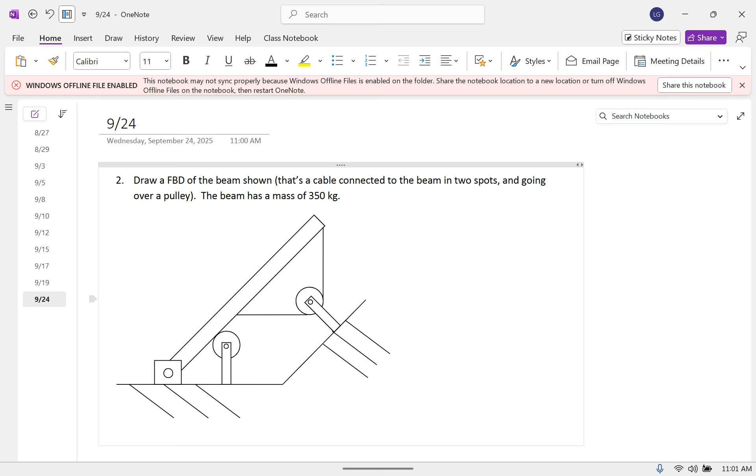So 3433.5. Okay. Well, first you have to understand what I'm drawing here. I made this problem before I got a bit better at using these drawing tools, but that's supposed to be a pin joint down there, a hinge joint down at the bottom. So if you didn't interpret that right, then that's not your fault.

Okay, so here's the closed outline. And then the weight acts at the middle. And that is 3433.5.

And now we have to go and look at all the places that the surroundings make contact. I'll start down at the pin joint. The rule for a pin joint is it restricts both components of translation, but no rotation. So that's an unknown force vector. I'll call that R.

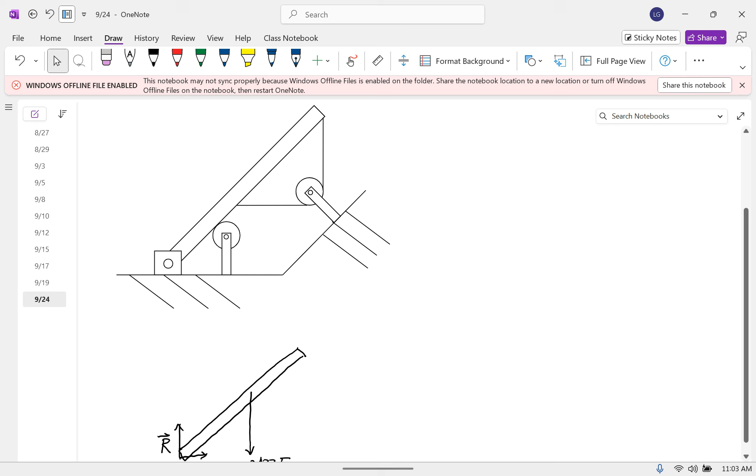And then the rotation, because the hinge allows rotation. Remember that the forces have to do with the motions that aren't there, not the motions that are there. Exactly, think about the degrees of freedom that are disallowed by the joint. So it doesn't disallow rotation, so there's no couple.

Now we'll go to that roller. The rule for a roller is that's perpendicular to the surface toward the body. So that's going to be... I think so, let's look.

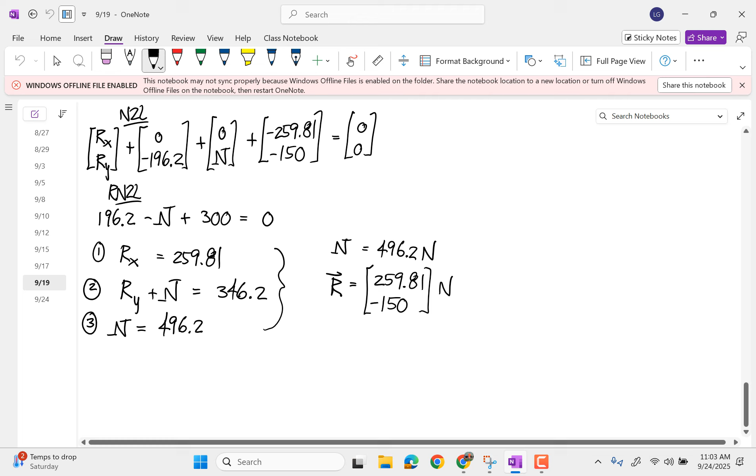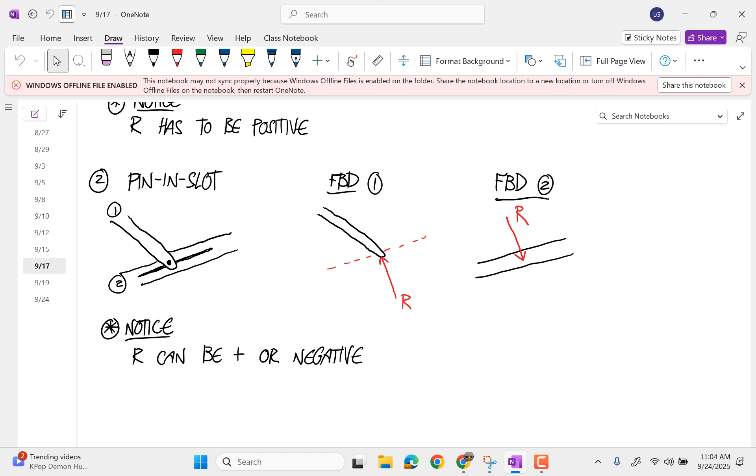Are we assuming no height because it's not specified? On a free body diagram, it doesn't matter since we're not doing any calculations, but you're right that if it's ever not specified on something that looks slender, you can just assume that the thickness is 0 or whatever. I don't think you specifically said the roller did that. I guess not, but you did an example with one later on.

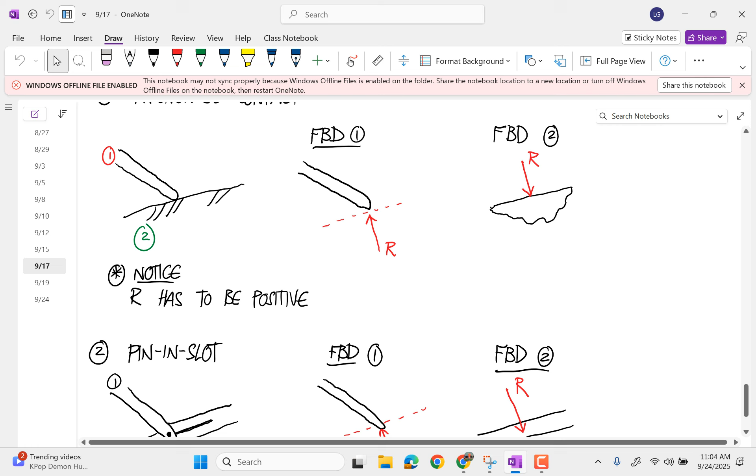Okay, so a roller works the same as a frictionless contact. So then this is going to be perpendicular to the surface toward the body. I have to give that a name that's not R, so I'll call that N.

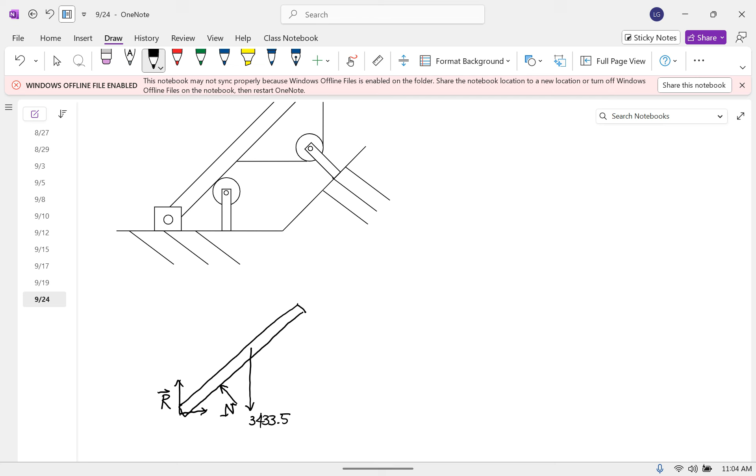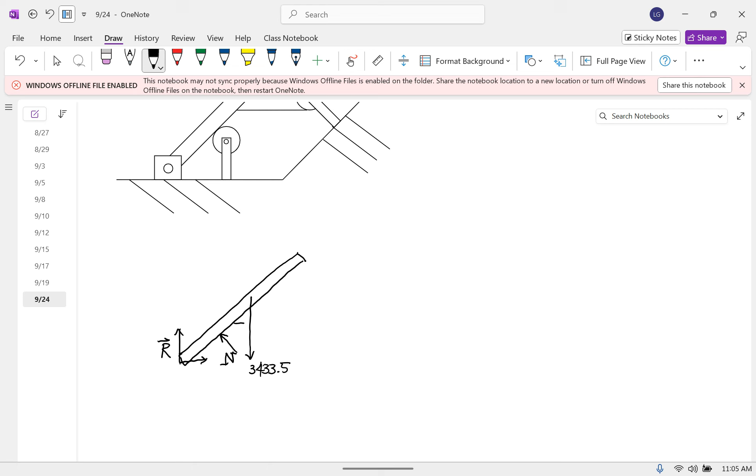And now the only two places that are left are the forces applied by that cable. The pulley doesn't touch this body, so we don't have to treat the pulley explicitly. So all we have is a cable force here that's parallel to the cable away from the body, and then another one here that's parallel to the cable away from the body. It's the same cable just going over a pulley, so it's the same T.

How do we know the cable is pulling and not pushing? Cables can only pull. Yep.

What is R in here? Reaction. So that is the unknown force vector that keeps that bottom point of that beam from translating anywhere. So if you gave this thing a little nudge and this joint wasn't here, that end would move. The joint keeps it from moving.

Professor, so for the joint, when can we say what specific angle it is, and when do we need to do the general R? Yeah, you can only say the specific angle when it is a frictionless contact or a roller. Okay, or a

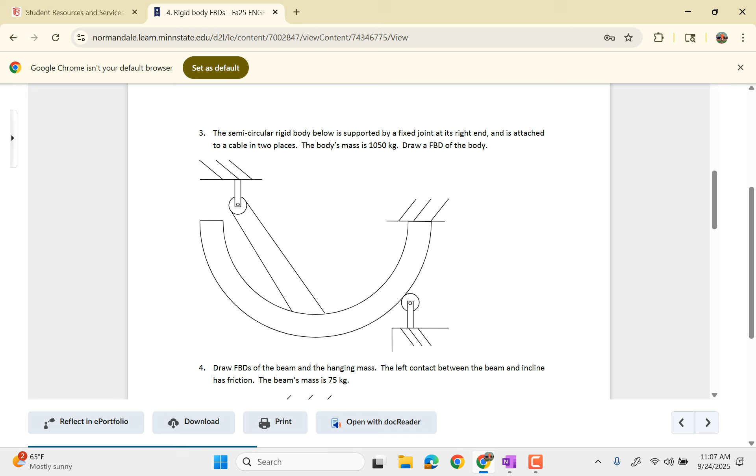Okay, so this is this curved body, and it's connected to a cable in 2 places that goes over a pulley. It's connected to a roller, and then there's a fixed joint at the top.

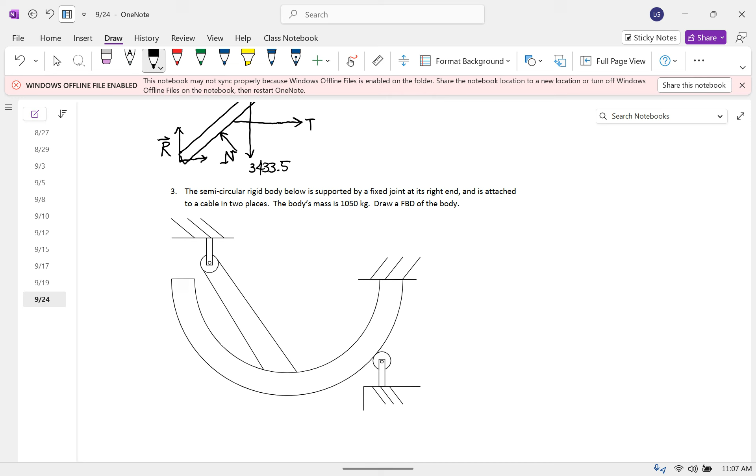One thing I want to point out is this one. No, I don't think this one should be solvable either, because we have 1, 2, 3, 4 variables. So Newton's laws only gives us 3 equations for a rigid body. So we can do this free body diagram, and all those forces are right, but we don't have a way to solve for those. And we won't in number 3 either.

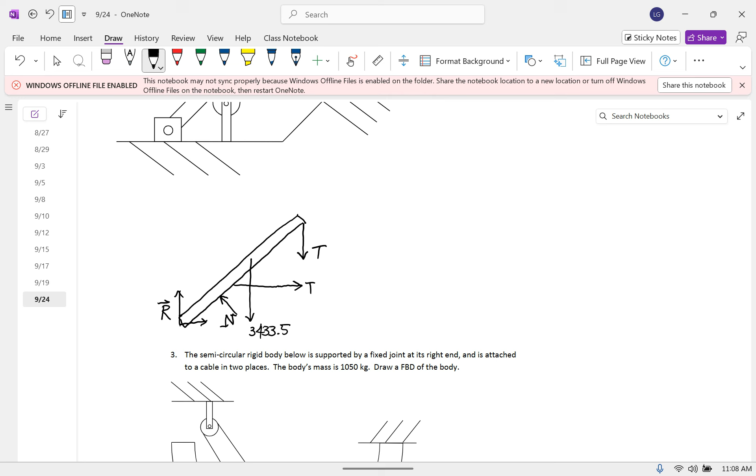Yep. We have 3 variables, R, N, and T. R is a vector, so that's an X and a Y component. Okay, so the free body diagram for this one.

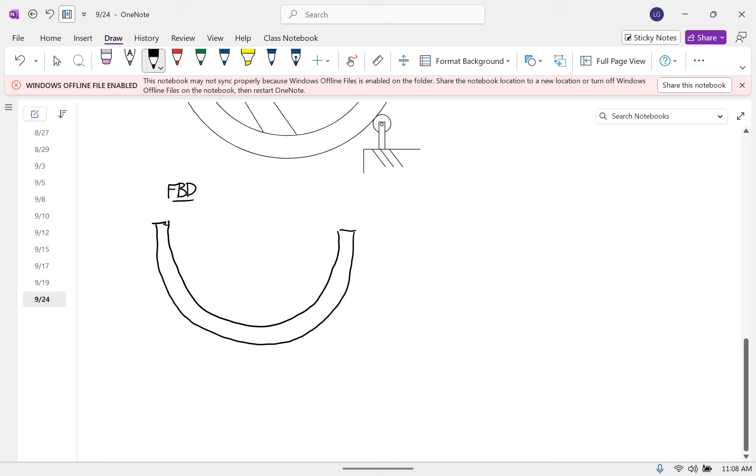Lovely. And then, okay, so there's a weight. The body's mass is 1,050 kilograms. That's very specific and very heavy.

Where would technically the center of mass be? Somewhere above? Yes, actually, you're right about that. So yes, the center of mass would be somewhere here. And later we'll be able to calculate where that is. Yep.

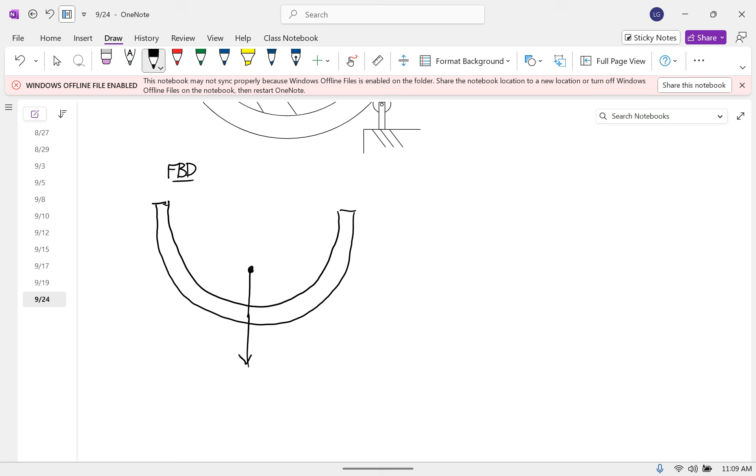And now we'll go to the contact forces. Up at the ceiling, that's a fixed joint. A fixed joint provides an unknown force vector and a couple.

So I'll put this in as an unknown force vector that I'll call R1. That's an X and a Y component. And then we also have a couple here, I'll call that M1.

And which one has priority there, or are they the same? Neither one has priority, but they're different things when you put them into the equations. That R1 is a force, so you'd have to figure out the r vector for that and put those components in the column for forces. The M1 is a couple, so you wouldn't have an r vector, you just put that in the moment column.

Now the roller here, the rule is that it's perpendicular to the surface toward the chosen body. That's kind of perpendicular to the tangent.

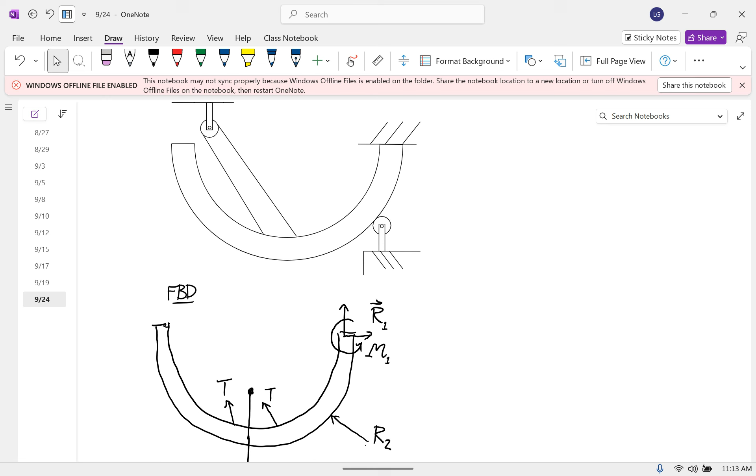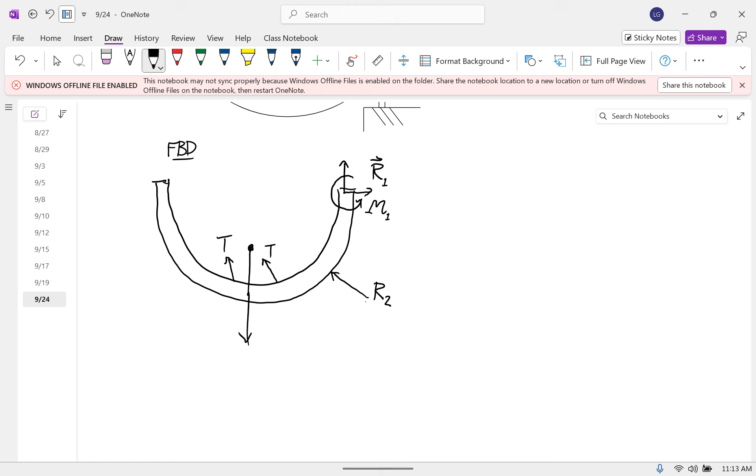Oh, I didn't do that, did I? Is it supposed to, could it just be on the bottom, or does it have to be placed in the middle? It acts from the center of mass, and the center of mass of this shape is up in the blank part. So really, you should put it up there.

We haven't talked about that yet. We'll get to calculations of centers of mass for more complicated shapes like this. This weight, by the way, I didn't write it in. It's 10,300.5.

Why do we have it? Because that's a fixed joint, and a fixed joint limits any translation. That's what the force vector is, and it also doesn't allow a rotation, so that's why the couple is there.

If we had two fixed joints, like if the left end was also connected, does that appear in statics? Well, you could do the free body diagram and it would appear, just with 3 more variables. You couldn't use statics to calculate what those loads are, because for a single body, you only have 3 equations, and then you'd have at a minimum 6 variables.

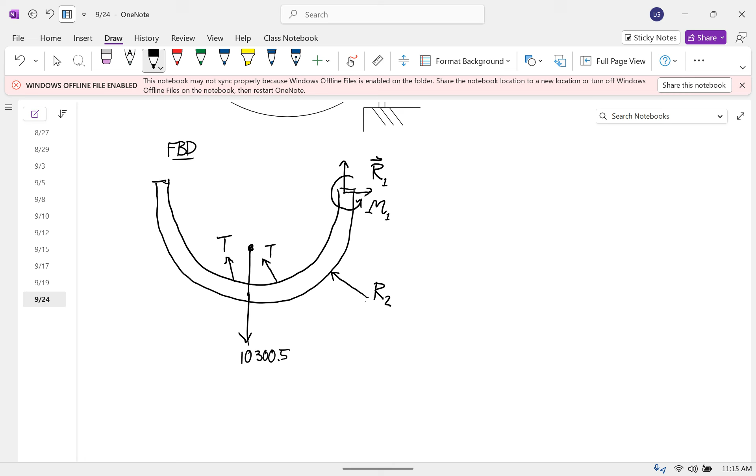You can still do that calculation, but it involves stuff that we learn in deformable mechanics of materials. It's called a statically indeterminate system. Both of these so far have been statically indeterminate systems. You don't have enough statics equations to solve it, but you can do other stuff to solve it, harder stuff.

Any other questions on these? Okay, and then the last one is 5.

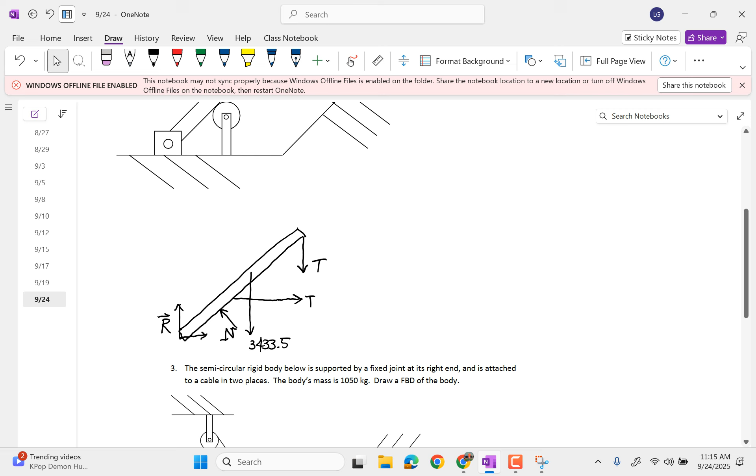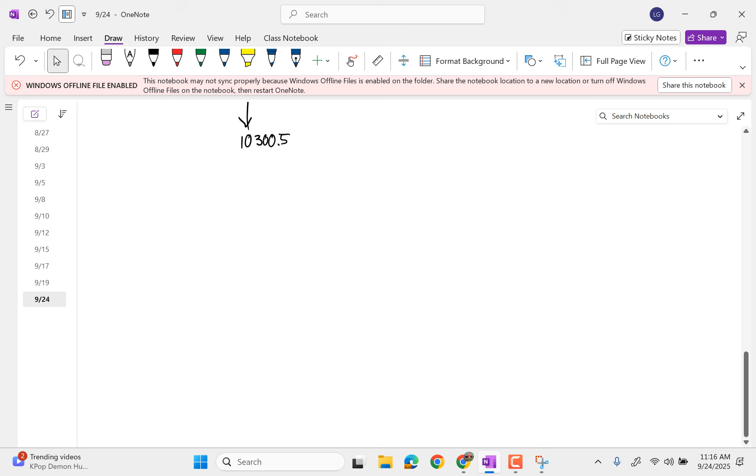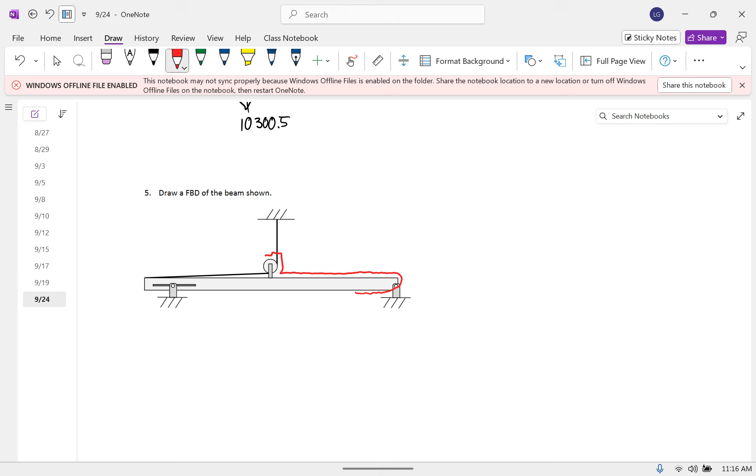Okay, there's two different ways you could think of this. If you're trying to solve this, the easiest way would be this. I'm going to draw a red line around what I'm isolating. I'm going to take all this, and then include that cable in what I'm isolating.

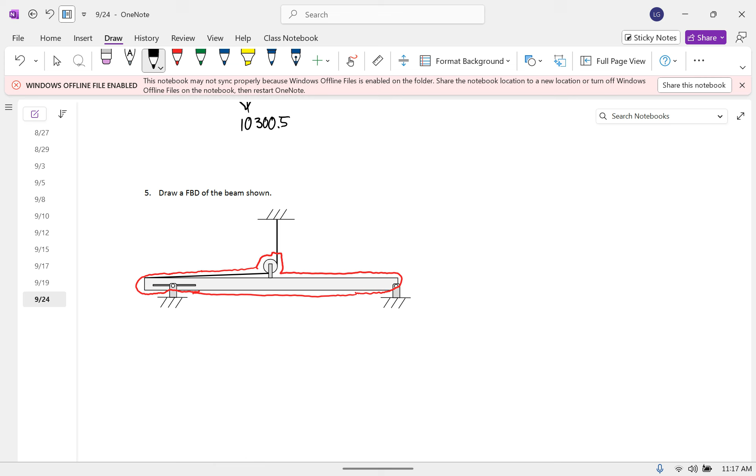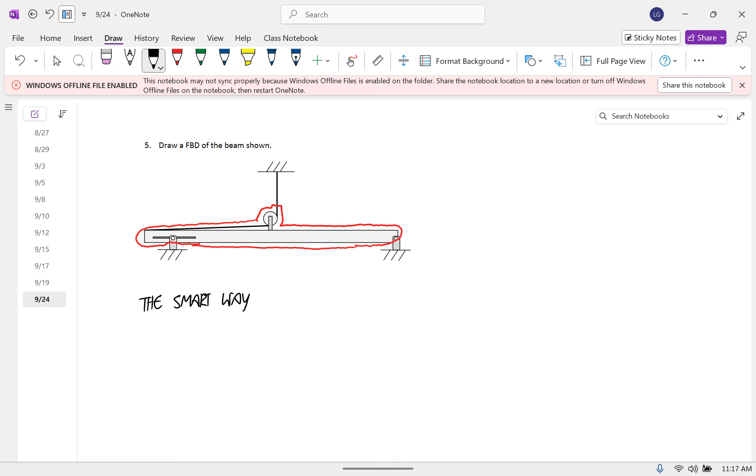So if you do this, I'm going to do this free body diagram two ways. This is the smart way, where you can sort of get at some calculations. So this free body diagram looks like there's this thing. Okay, so that's my free body.

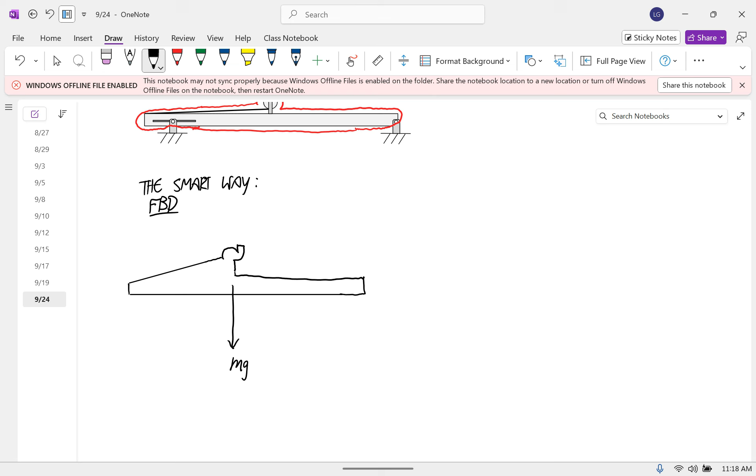And now we can think about the loads. There's a weight force - we don't know what the mass is, so I'll just call that mg. Does including the pulley change the center of mass? Well, if the pulley had a significant mass compared to the body - in this class, I can't think of a time where I consider the pulley to have significant mass, so you can just always treat it like zero.

Also, you'll see in dynamics that if the wheel of the pulley has mass, it actually changes the behavior of bodies when they're accelerating. So when I drew mine, I just drew a beam, and yeah, I'll do it that way too. But I want to show how these two ways of thinking about it are different, and why sometimes it's useful to think a little bit about what you're going to isolate, what you're going to include in your body.

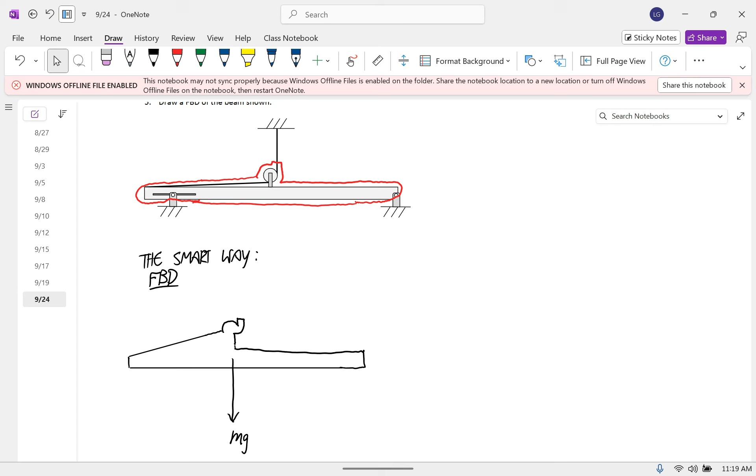Okay, now over here we have a pin or hinge joint. I'll call that R2, working from left to right. I'm going to call the one on the left R1. And then over at the pin and slot joint, that is a force that's perpendicular to the slot - that's just a scalar, R1, I'll call it.

How do we know the direction? Could it be going on top? Down? Yeah, down - yes, it could be going down. So with pin and slot joints, whichever way, I could have drawn it down or up, and it can come out positive or negative. If I did the calculations with it going up and you did it going down, we would get the same absolute value of answer and opposite signs.

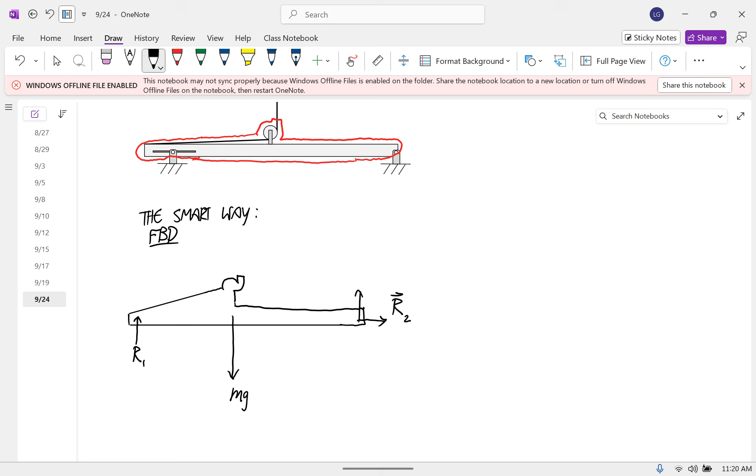And now the last one - where's the final third place where the surroundings contact the boundary? It's where the cable that I didn't include contacts the pulley I did include. So that's a pulling force this way, and I'll call it T. But if I were to draw the pulley by itself and then had T coming this way and then T coming out of the pulley like this - is that practically the same thing? Okay, let's do that one too.

So let's think of how many variables we have here. I'm assuming that we knew mg, that mass just wasn't given, so we have 1, 2, 3, 4 variables. And let's think about some of the other possibilities. So now let's say we go like this.

Okay, so we have mg down again. We have R2 and R1. And we have T this way, T this way. And then that cable is touching one more point - it's touching here, so we have T that way. And that's a fine way to do it.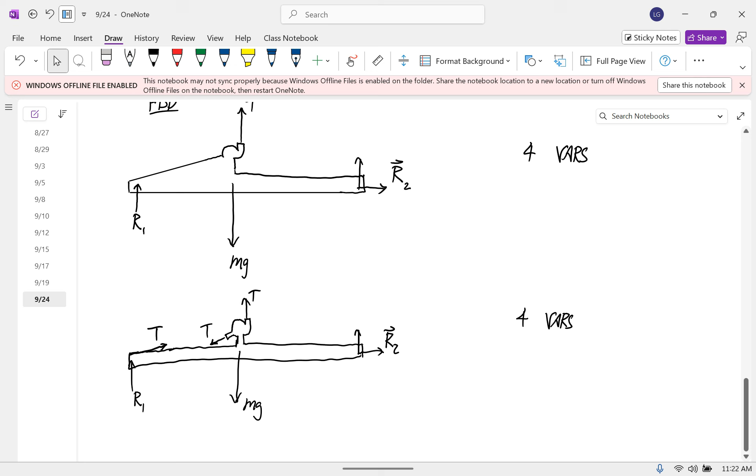Okay, so let's do it now without the pulley and see. Can you do that? You can, but I'm going to show you why in this case this works better. It's not wrong for a free body diagram - you can totally do it that way. But when you went to the calculations, you'd be in trouble here. Well, this is four variables, so you're in trouble no matter what, unless you are given one of these values.

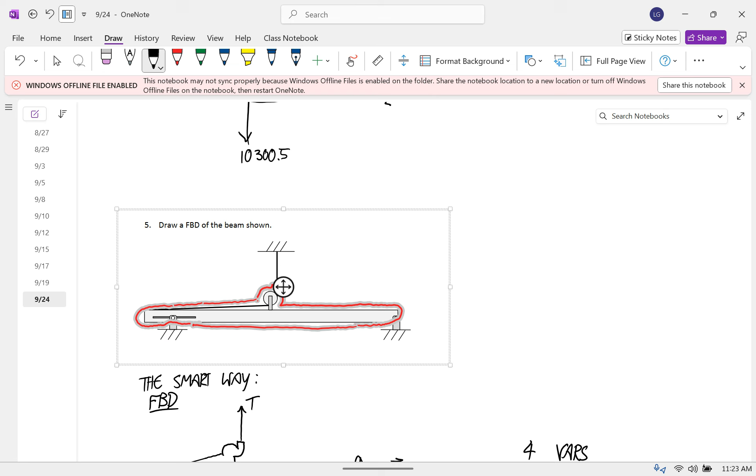But let's see what happens if we don't include the pulley. So we have mg. Here we have what I called R2, and here we have R1. There's a contact with the beam at the left end where the cable touches it, so we have a T there. And then we also have a fixed joint between the base, or whatever you call it, of the pulley and the body.

So here, now I would have to put in an unknown force vector R3, let's call it, and an unknown couple M3. And so in this case, that's a perfectly fine free body diagram, but when you go to do equations, it's not as useful as the other ones because you have 1, 2, 3, 4, 5, 6, 7 variables.

Sorry, trying to put my question into words. It seems like which one you do depends on what you're trying to find out.

Like if you're trying to find out the force, how many screws you need to attach the pulley to pull with, then you need to do the last one. But the first one is okay. I put like 7 million screws in there, that's not coming out. So yes, you're right.

I think what you would want to do is use the simplest approach you can to find some variables, and then piggyback on that. For example, if we could calculate what that T is based on a simpler one, now you could isolate the pulley system. It has a fixed joint at the bottom, but now you know what those T's are, and you could piggyback off that.

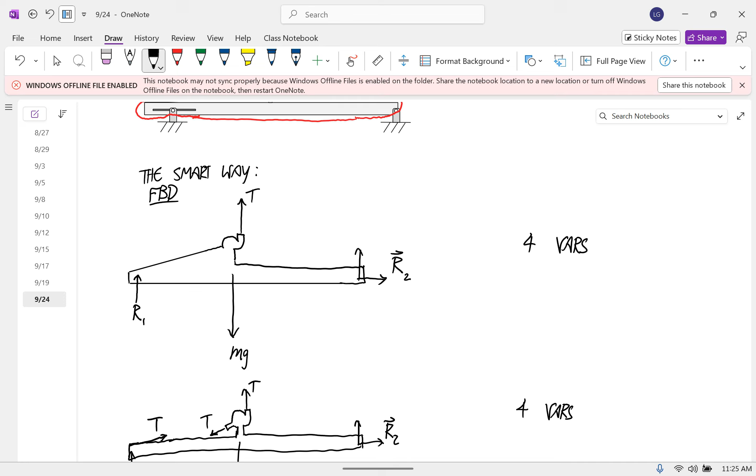But yes, that is very true, and that is kind of the principle of internal loads we'll get to in deformations if you take that course — being very conscious of where you want to make your cuts so you can calculate what loads are happening at a specific place. So overall, the last one is okay, but just for the body diagram.

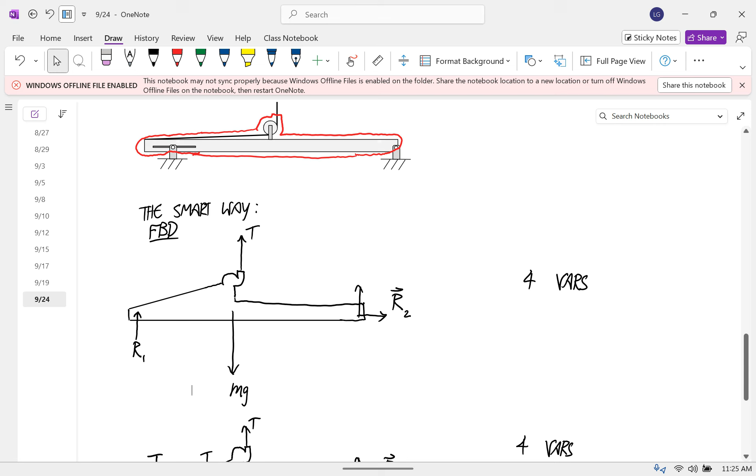But when you want to use it, then it's like trouble. All I'm trying to do with these problems is get you used to the idea of identifying joint types and putting in the loads associated with those joint types.

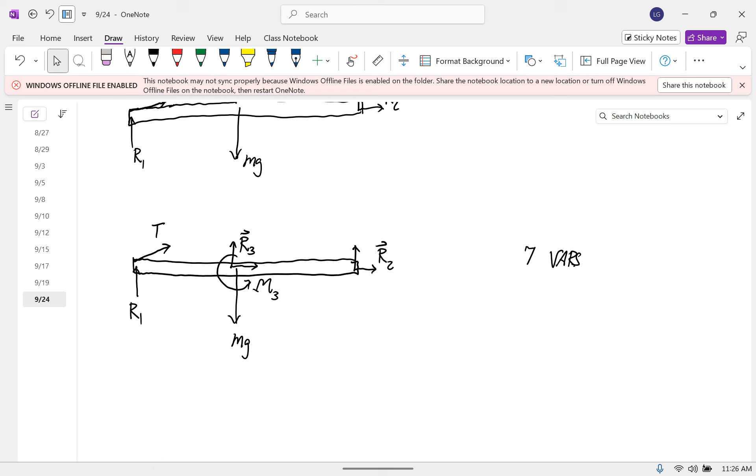So for those purposes, this is perfectly fine. But once you start trying to do calculations, ideally you'd ask why you'd see that right away. Maybe you wouldn't — I don't remember what I saw when I first did this problem. But if you look at this and see 7 variables and can't think of another way to do it, you'd think: is there any way I could simplify this problem to calculate other stuff? If you include some other stuff inside your system, it's easier to calculate some things.

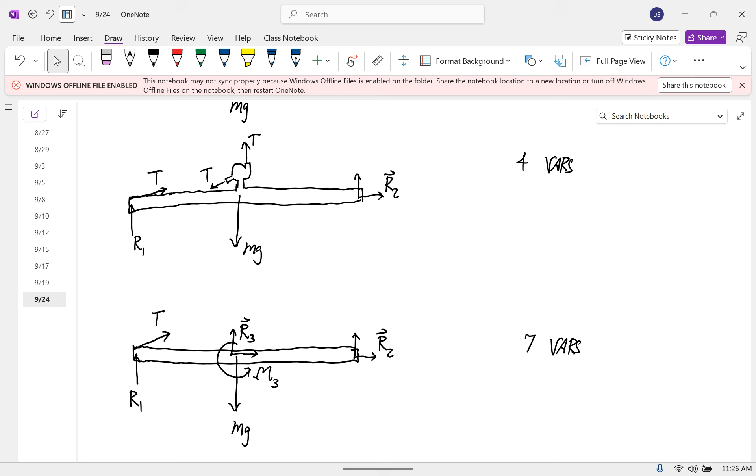Okay, so now we're going to start going through 3D joints. Is 3D joints different than rigid? Well, it's still rigid bodies, but it's 3D rigid bodies. So let's call it rigid bodies, 3D joints.

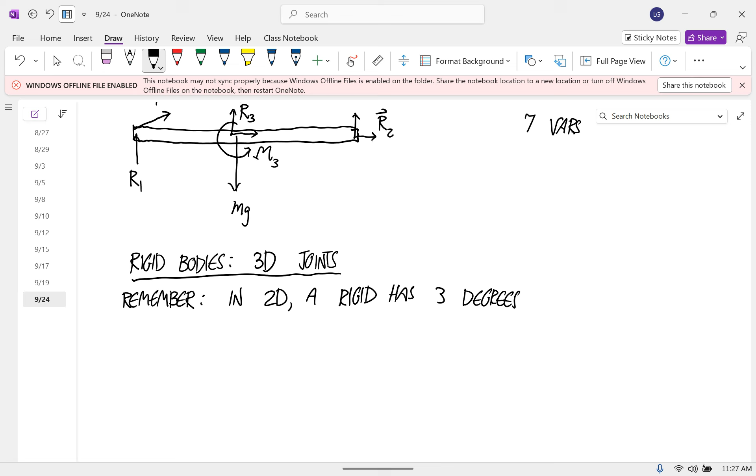Okay, so remember that when we talked about 2D joints — in 2D, a rigid body has 3 degrees of freedom: 2 translational and 1 rotational.

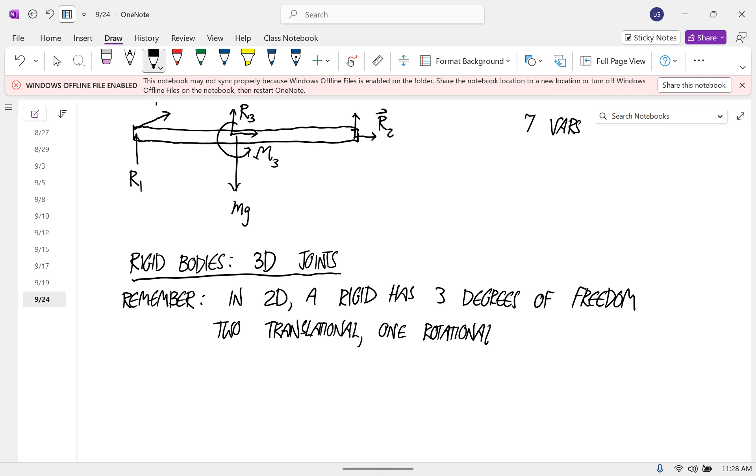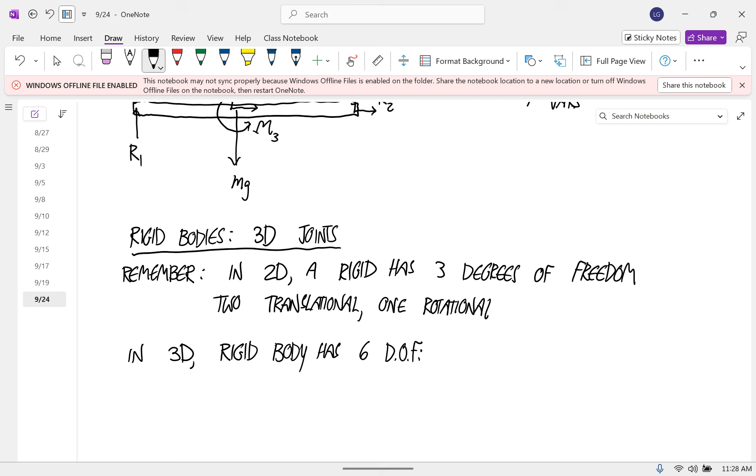In 3D, a rigid body has 6 degrees of freedom, and that is 3 translational and 3 rotational.

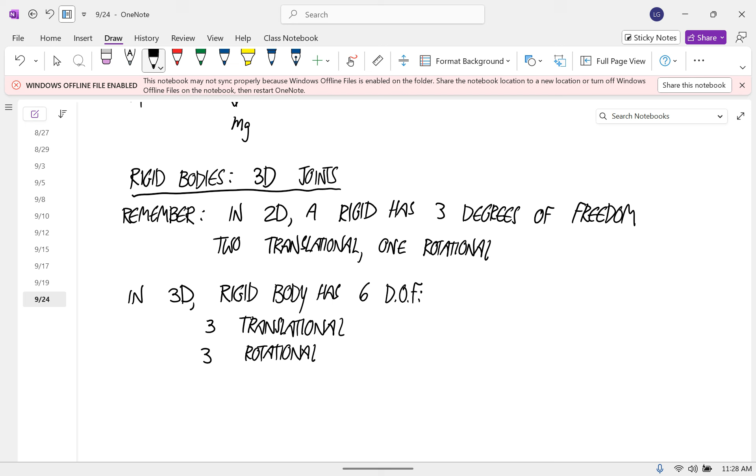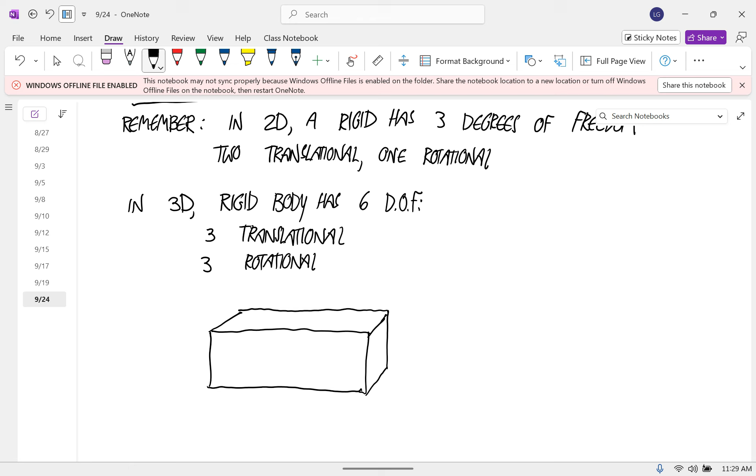So if I draw a 3D rectangular solid, it can translate along this axis, or this axis, or this one. And it can rotate about each one of those axes, this way, or this way.

You couldn't rotate about the X and Y axes and still have motion in the XY plane, because the body would rotate out of the plane. But now that you're in 3D, you can rotate about any of these axes and it's still 3-dimensional motion.

So you'd expect, the way the joints worked in 2D, we had all these different joint categories based on how many degrees of freedom were eliminated. We'd expect to start out with 1 and go all the way up to 6 this time. With 2D, we started at 1 and went up to 3. And that's what we're going to do.

Okay, so we're going to start with things that only restrict 1 degree of freedom, and go all the way up to a fixed joint or weld joint in 3 dimensions, which introduces 6 variables and restricts 6 degrees of freedom.

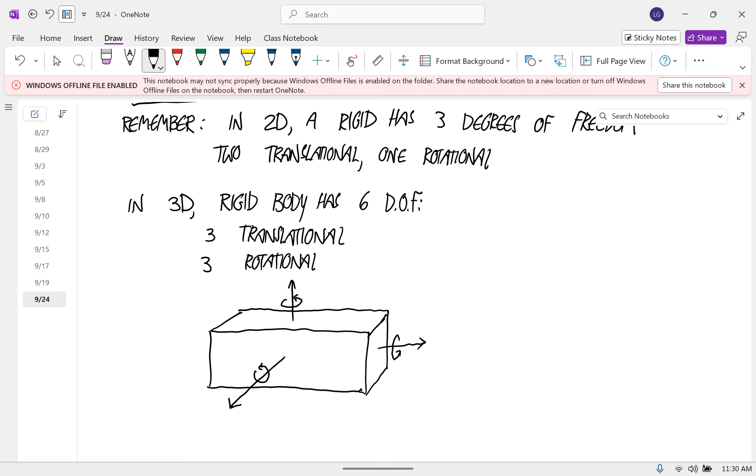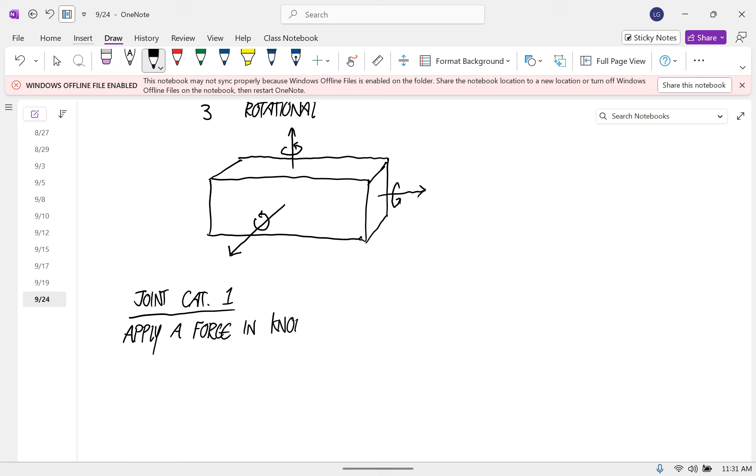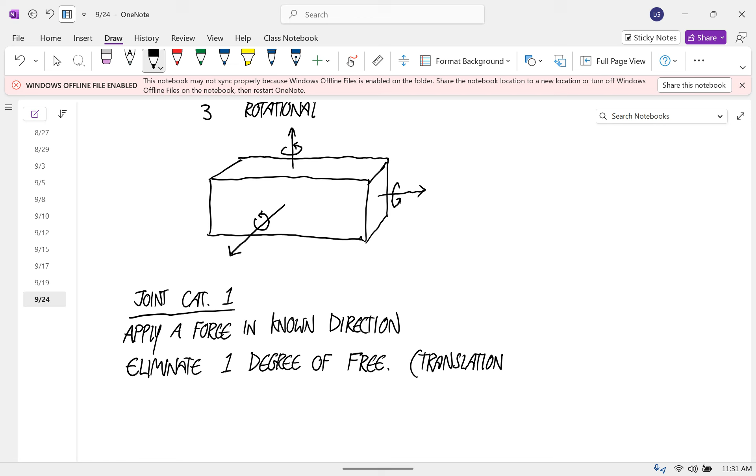Okay, so joint category 1 — all of these apply a force in a known direction. They eliminate 1 degree of translational freedom, and they introduce 1 variable into Newton's laws.

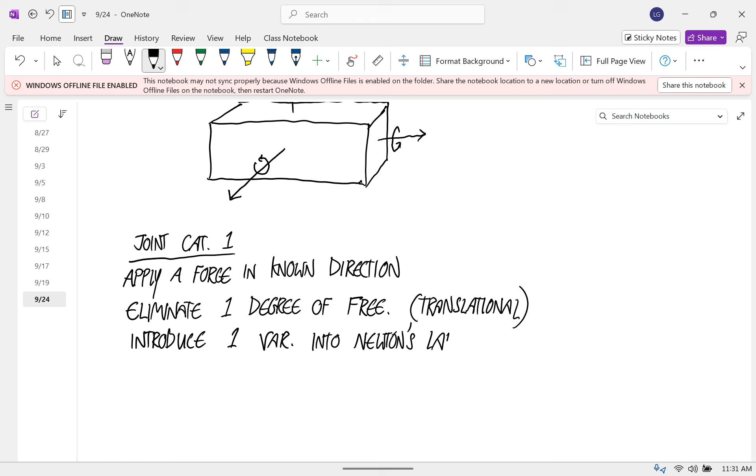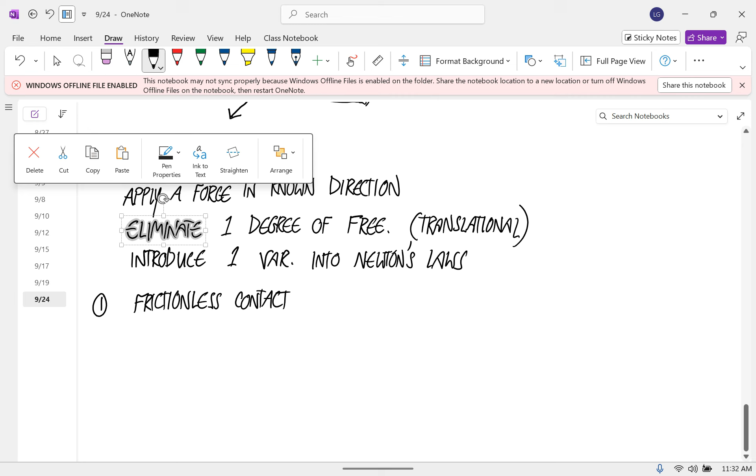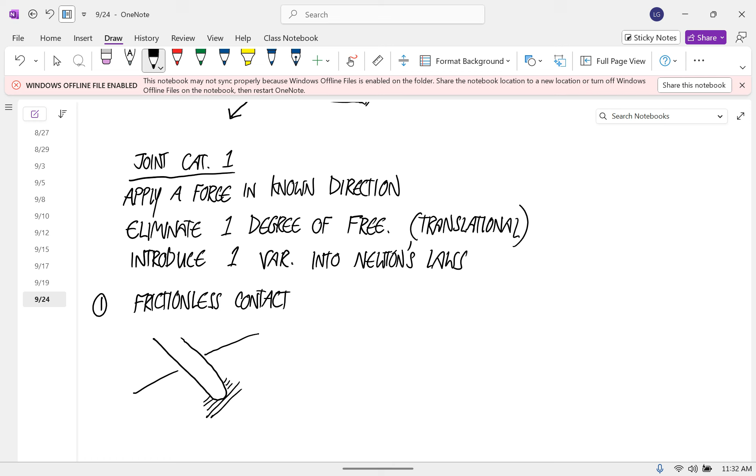And so the first is frictionless contact. If this is body 1 making frictionless contact with a surface in 3 dimensions, a free body diagram — if this is the angle of the contact, it's going to be perpendicular to that surface of contact toward the chosen body. So that's just like it was before, it just has to be perpendicular to a surface instead of a line now.

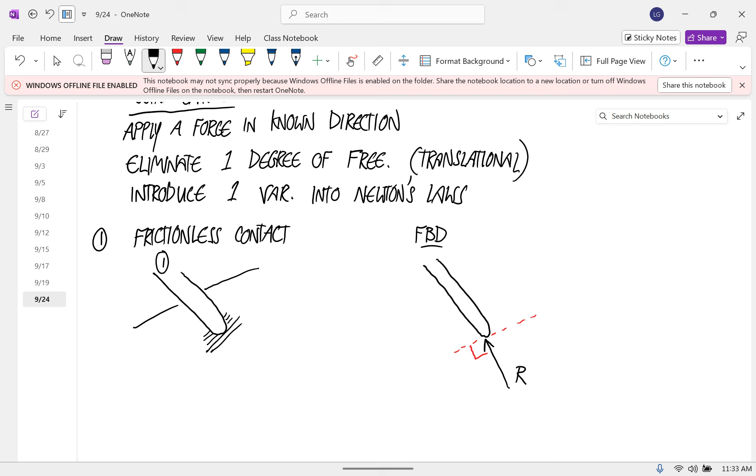The second one is a roller. It's important here that this type of roller is a ball, not a wheel. The reason for that is a wheel has a preferred direction — if there's any friction on a wheel, it actually does limit translation perpendicular to the rolling path. These 3D drawings get a little hairy, but here's a roller.

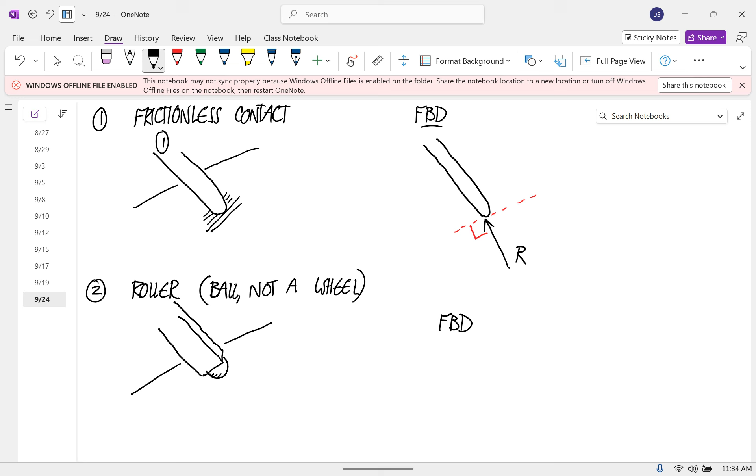And a free body diagram — again, if the surface is this way, the force is perpendicular to the surface. Could this be a ball and socket joint? Could a ball roller be that? No, a ball and socket joint is going to be something else, because you can imagine something connected to a ball and socket joint — that point is locked in place, so it limits the translation of that point.

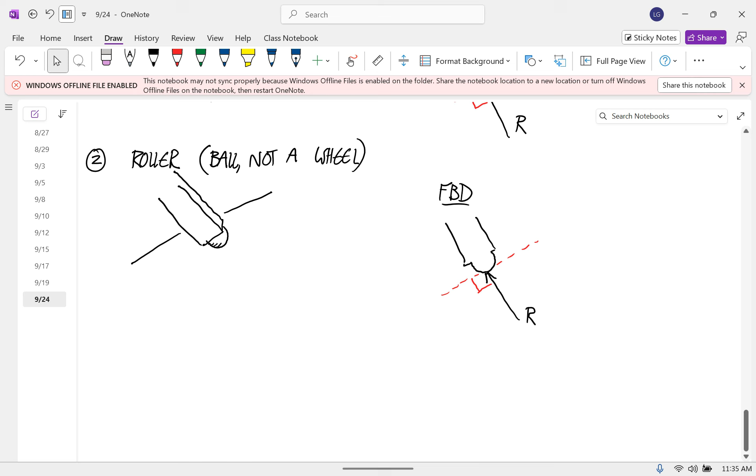But it is a ball in a socket so that it can't go anywhere, but it can roll free. This can roll — it's like the rollers, these are wheels, but office chairs that have balls on the bottom, it's like that. One thing to notice about these: in both of these 2 cases, R must be positive.

Any other questions about those two? Right, that's for both frictionless contact and roller. Yes, R has to be towards the body. If R was away from the body, it would be like it's hanging onto the floor somehow, like glue, and that can't happen. If they separate, then there's no force at all. So it really would be like it's hanging on somehow.

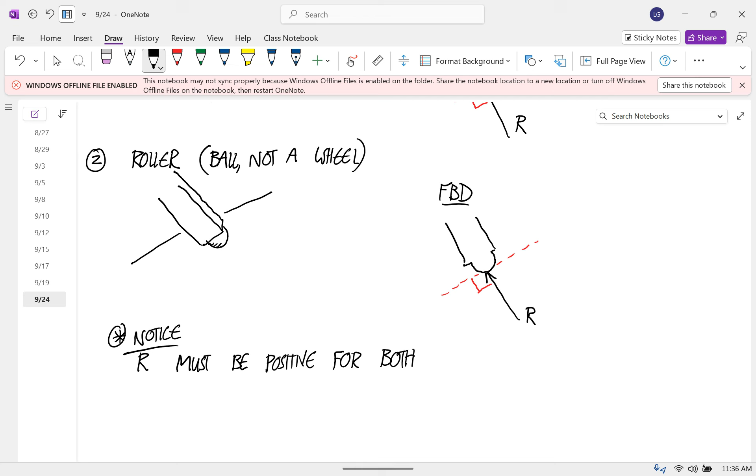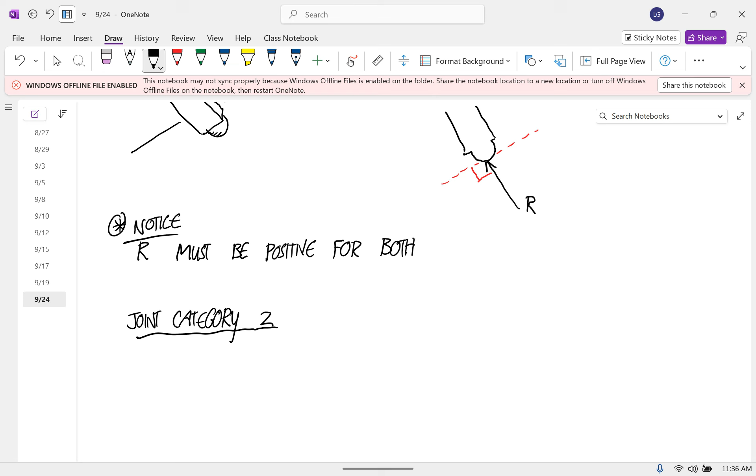And now we'll go to joint category two. There's only one of these, and it applies force components in two directions. So how many degrees of freedom does it eliminate? That's translational degrees of freedom. And then how many variables does it introduce into Newton's laws?

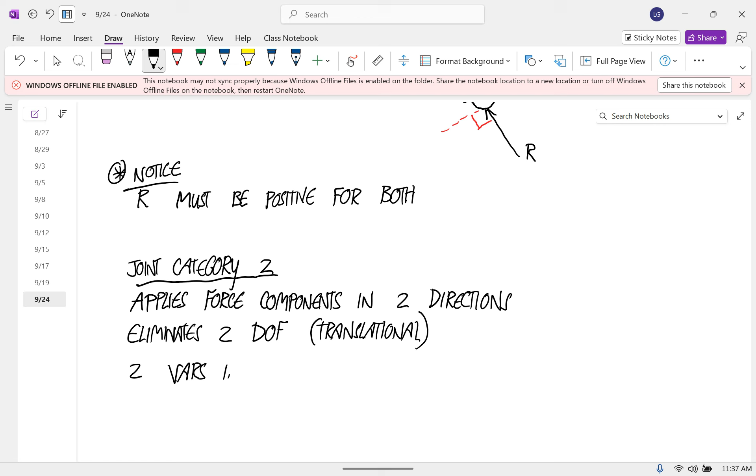So the one in this category is a wheel with a preferred direction. Does that mean it only spins in one direction? No, preferred means it has a path direction. Think of a unicycle, that's one wheel. Friction keeps that wheel from sliding side to side along the concrete, but it allows it to roll forward and back. That's what I mean by preferred direction. It can move forward and back. It doesn't eliminate that degree of freedom, but it does eliminate side to side translation.

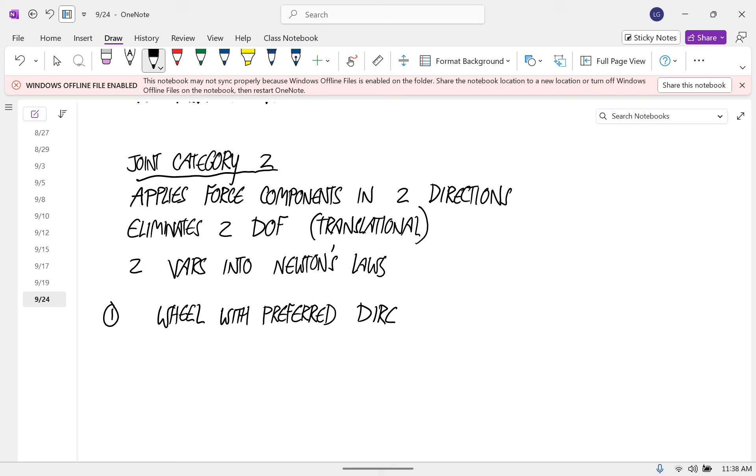Okay, so now I'm going to spend the rest of the class trying to draw this. And its preferred direction... oh my God, that went haywire. Okay, its preferred direction is this.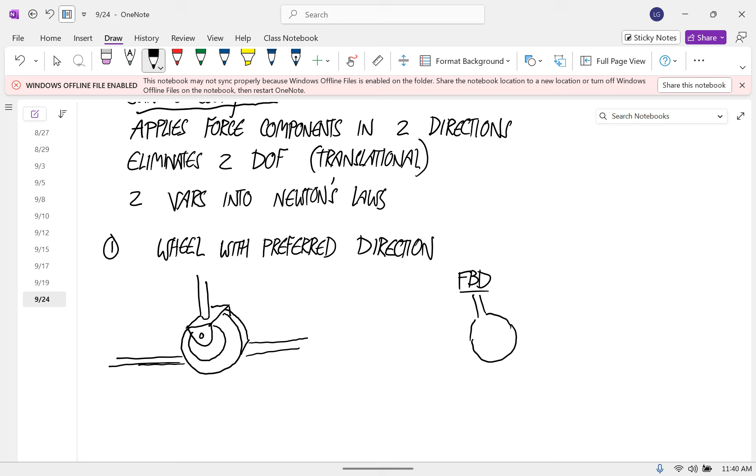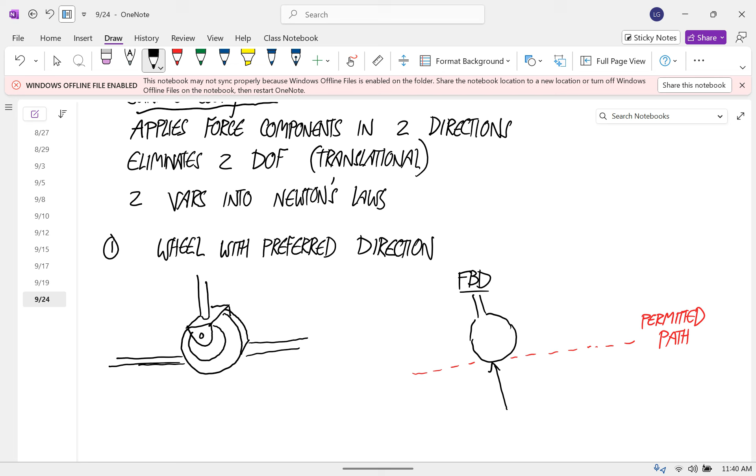And a free body diagram looks like this. So if there's the wheel, and let's say that the path is this, let's call that the permitted path. That's the direction it rolls. There's a force perpendicular to that, this way, and that force has to be towards the body. That's the one we're used to, I'll call that N. But now there's also a force like this, in the Z direction, I'll call that F, and that has to be perpendicular to this path also.

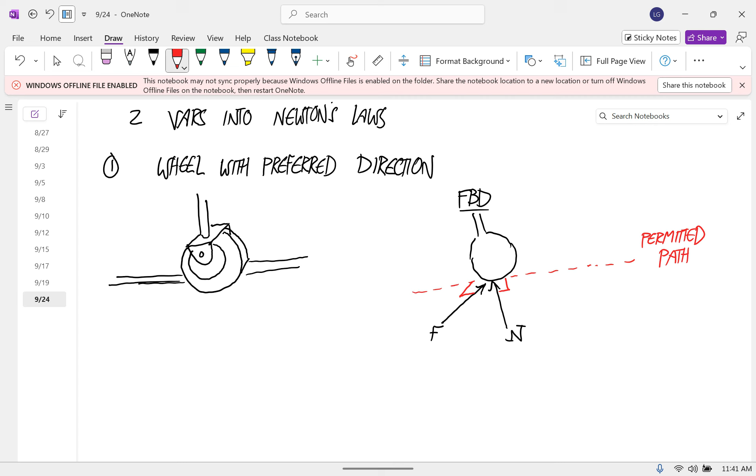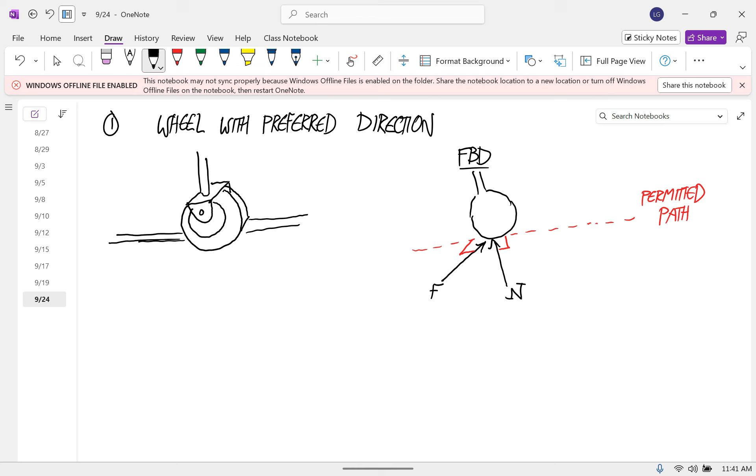Where are we at, ten more minutes? So let's do one more, this is an important one, and then we'll finish next time. So next is joint category three.

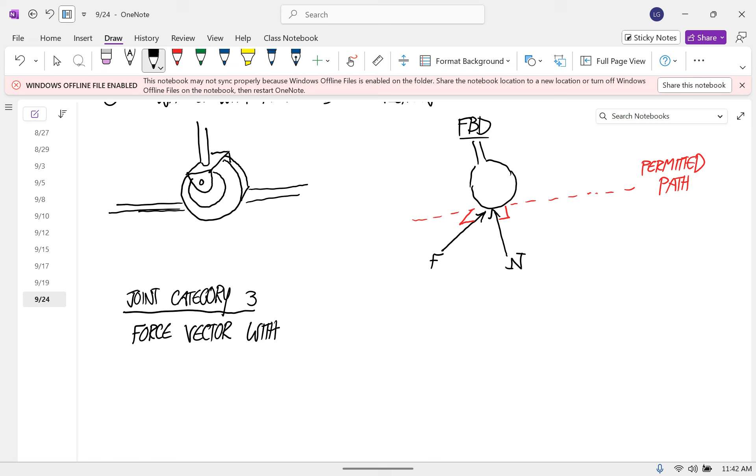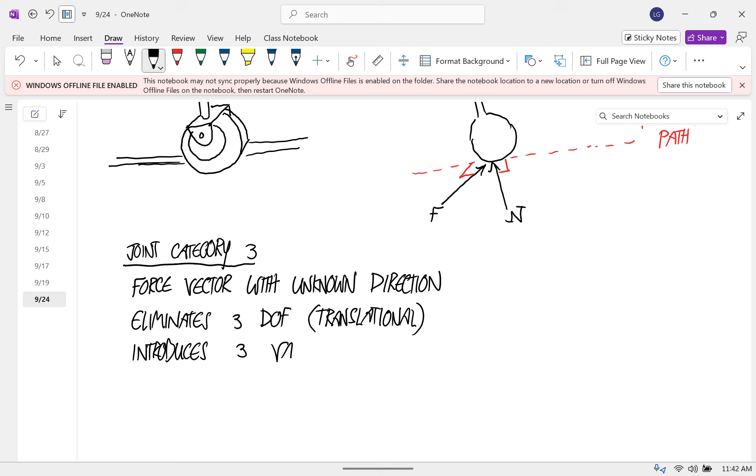This is a force vector with an unknown direction. It eliminates three translational degrees of freedom, and it introduces three variables into Newton's laws. And that is a ball and socket joint.

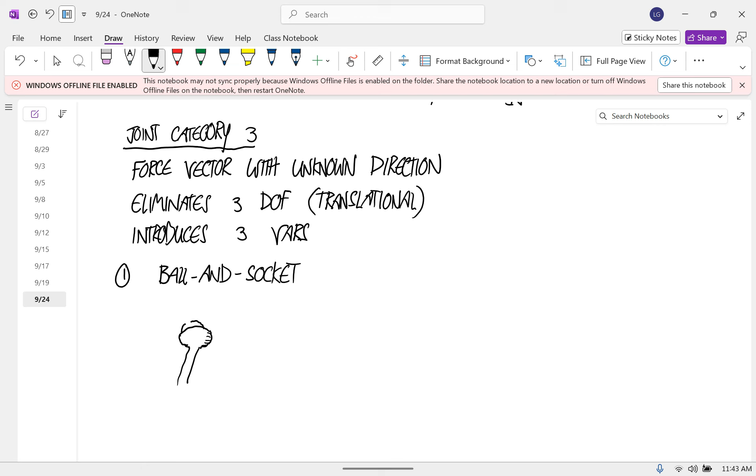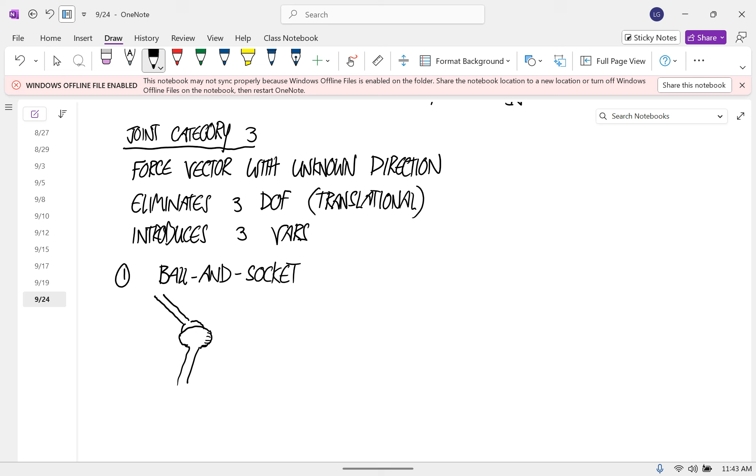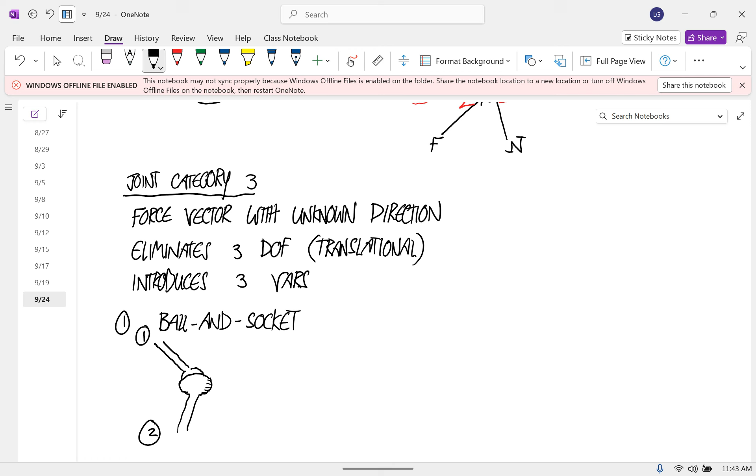So that's a joint like this, that those two pieces can rotate in any direction relative to each other. So the other ones have kind of been things that we tend to use with one of the things being a body that we might isolate and one being the ground. This one, I'm going to think of a body 1 and a body 2, and I'm going to draw both of these two free body diagrams. So a free body diagram for body 1.

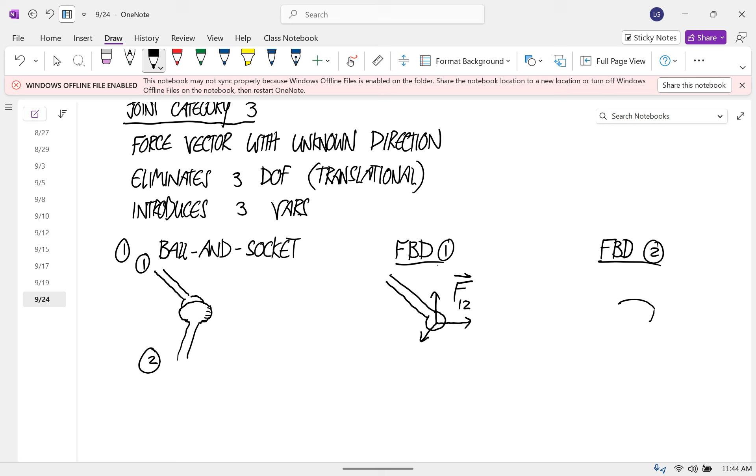This is an unknown force vector with three components, so I'm going to draw little vectors in each of the three axis directions. I'll call this the force on 1 by 2. And then a free body diagram of body 2, again I'm going to draw 1, 2, 3 vectors in the coordinate system axis directions. This is the force on 2 by 1, and that's the same thing as negative force on 1 by 2. Any questions about that?

Okay, so I'm going to stop there because the next two get a little more complicated. I have one, yeah.

Can you talk about joints that eliminate, like a pin joint, but it can only move 90 degrees? No, and the reason we're not is because we're talking about statics. If the thing isn't moving, it's either at that limit or it's not at that limit. If it's at the limit, it's a different kind of joint, it restricts that motion. In a way, that's the same reason we talk about friction the way we do: either friction is engaged, in which case we treat it like it eliminates all motion, or it's not engaged and we treat it like it's not there.